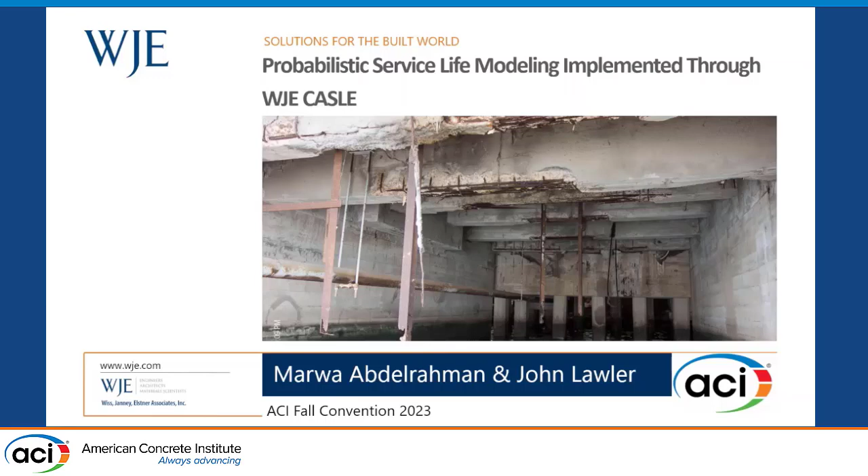Today I'm presenting on probabilistic service life modeling implemented through WJE CASLE. WJE CASLE is our in-house modeling software. CASLE stands for Corrosion Assessment and Service Life Evaluation. The model was built in-house by a materials engineer. I was involved in the development of this model, as well as some of the people in our audience here.

Being developed in-house gives us full control over the process, so we can customize how the model handles some of the input parameters based on the specific conditions and circumstances unique to each project. This is one of the important aspects of our tool because it makes it appropriate for handling unique situations.

We also use probabilistic modeling, so we recognize the inherent variability with concrete construction and concrete material, and for that we use a probabilistic modeling approach. We used our model for modeling both existing and new structures, different types of structures, and we validated our approach using data collected from actual field investigations.

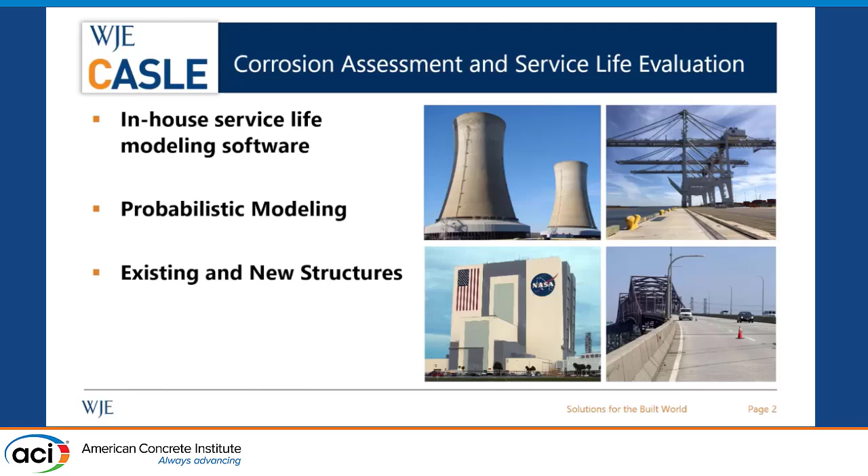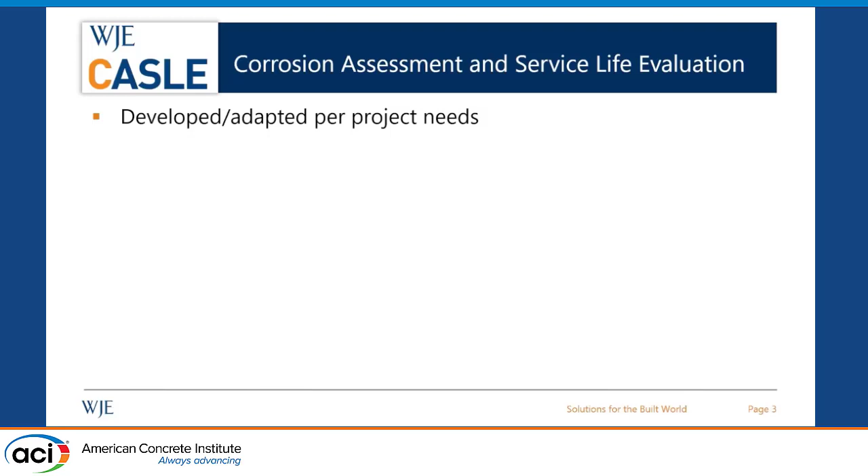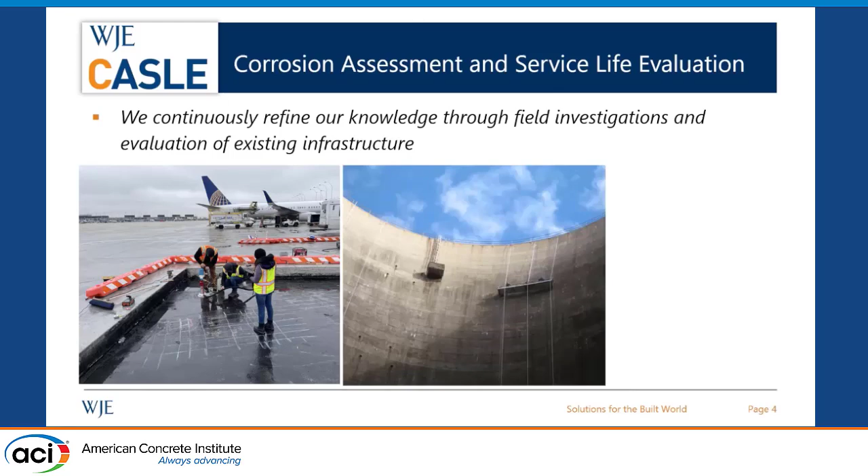Our model started with investigations of existing structures, so we developed and adapted it per project needs. We kept adding to the capabilities of our model as we came across new challenges on our projects. We looked at different types of structures, and most importantly, we continue to refine our knowledge based on what we learn every day from hands-on field investigation of existing structures to inform the durability design of new construction. This included work on bridge decks, airports, power plants, and industrial ports.

We use a customizable approach. Our model can consider cracking of concrete, for example. We can consider protective measures like sealers and coatings. We can also consider changing exposure with time, and we can model multi-layer systems, so we can model concrete overlays. We also have experience based on lab testing and field investigation on polymer overlays, so we can consider that in our model - thin polymer overlays or pre-mixed polymer concrete overlays.

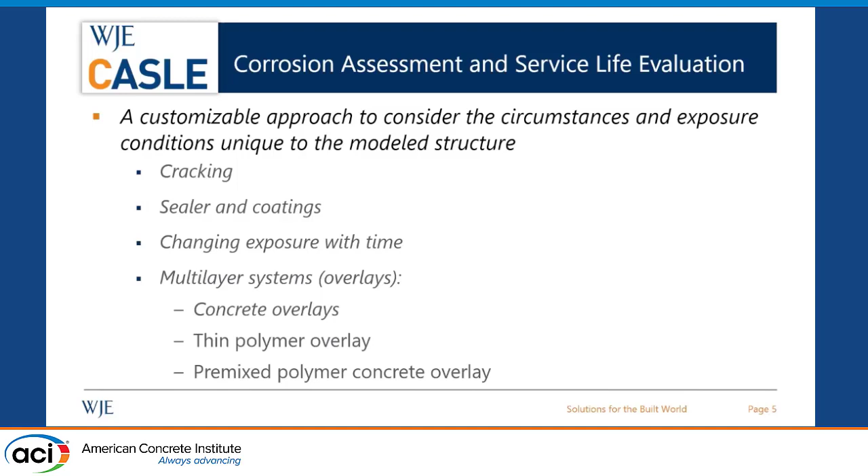In addition to all the information we learned from numerous field investigations, our model is also founded on approaches and methodology available in the literature - mainly Fib Bulletin 34. For some input parameters, we handle it similar to what is described in Concrete Society Technical Report number 61. We also refer to documents developed by the 365 committee here in ACI, and the Life 365 technical manual that Mark described earlier. This is, of course, in addition to other sources in the literature and research papers.

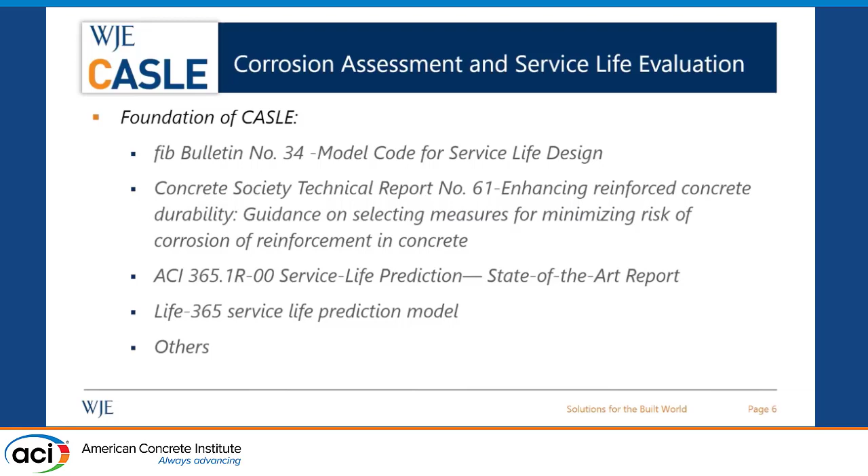Working with new structures involves making some assumptions. For example, for concrete cover we assume distributions based on construction tolerances because we don't know yet the as-built conditions. Sometimes we also assume different types of rebars, and based on the results we can decide which type of rebar would be appropriate to achieve the service life requirement. We make assumptions about exposure as well, and we test concrete performance to inform our model.

For existing structures, on the other hand, we model what is the percentage of corrosion-related damage and how that increases with time, relying on input parameters from the field investigation. Typically we collect core samples, look at chloride profiles, and based on that we can define our concrete properties and exposure conditions.

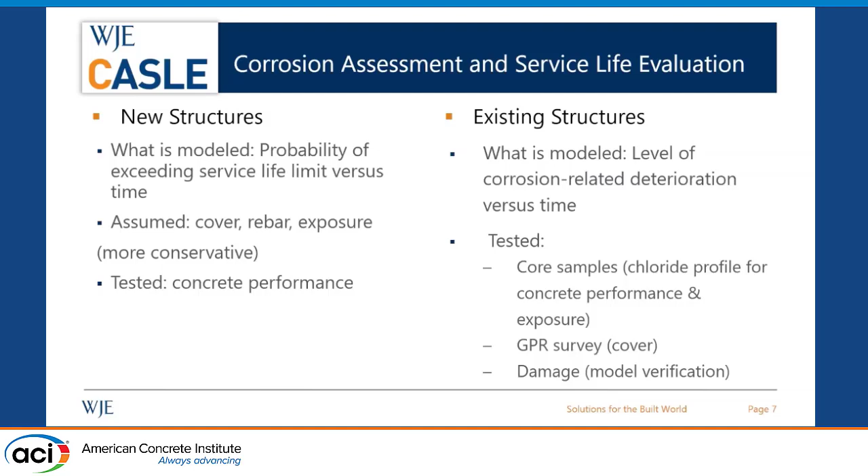We do GPR survey, and based on that we define our cover distribution. We verify our model based on the current damage levels versus what was predicted, and we can calibrate our assumptions based on that. We have validated our approach through lots of projects.

Going into the methodology of our model, and based on the cases we are given, here we're focusing on chloride-induced corrosion. I'm not going to present on our capabilities for carbonation-induced corrosion, rather focus on chloride-induced corrosion.

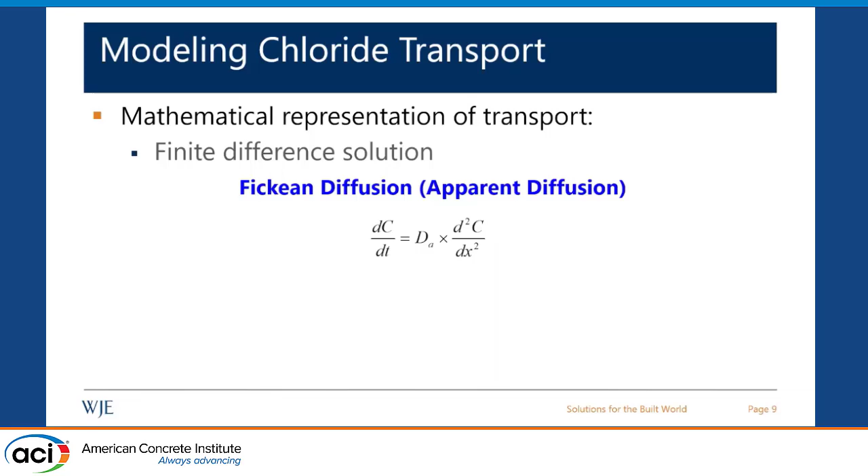We use a finite difference solution to Fick's second law of diffusion, similar to what Mark presented earlier on Life 365. But here we have full control over the process - we do the discretization with depth of the concrete and also with time, but we have full control to decide what delta X and delta T to use. That gives us the capability to model even shallow cover, which was the most discussion we had earlier here.

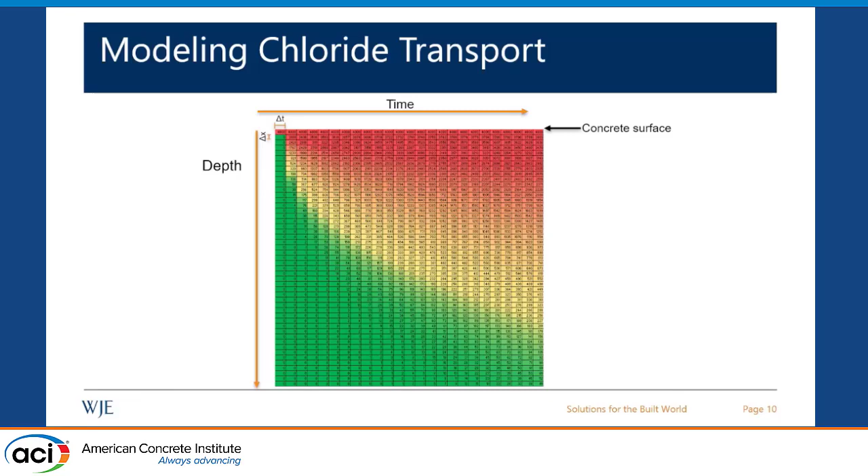At each time step, we look at the chloride profile and how that changes with time, and we define the initiation time as the time where the chloride concentration at the depth of the bar exceeds the critical concentration, which we call the chloride threshold.

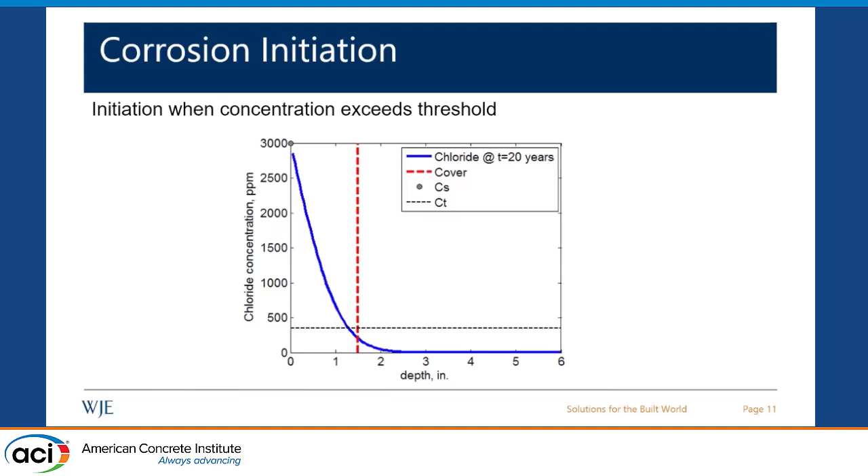Since we are performing probabilistic modeling, we describe the key input parameters with probability distributions. Our model is flexible in that we can use any probability distribution. We're not limited to normal distribution.

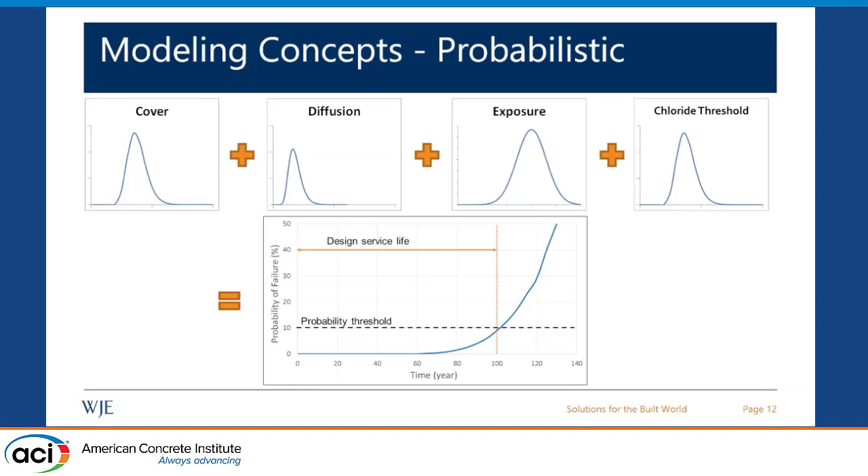So we often use, for example, log normal for cover distribution. We use beta distribution to define the chloride threshold for black bars, for example. And again, we rely on the specific conditions of the project to define the distribution for this input parameter. The result would be the probability of failure, or in the case we are discussing today, the probability of corrosion initiation with time.

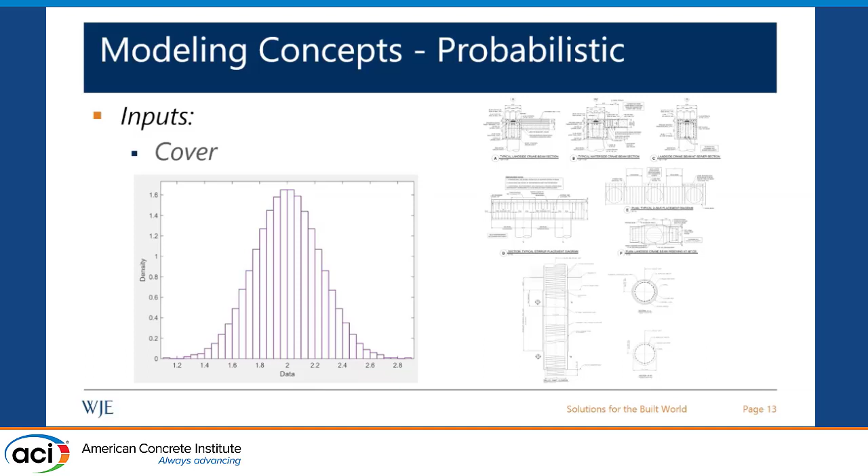So typically I'm going to go briefly on how we define the input parameters. For example, for the cover, we rely on the design drawings to decide on the average value, and then we decide the distribution based on typical construction tolerances. Sometimes this is not defined early in the project, and we use the service life modeling to inform the appropriate cover thickness to use for the element we are analyzing.

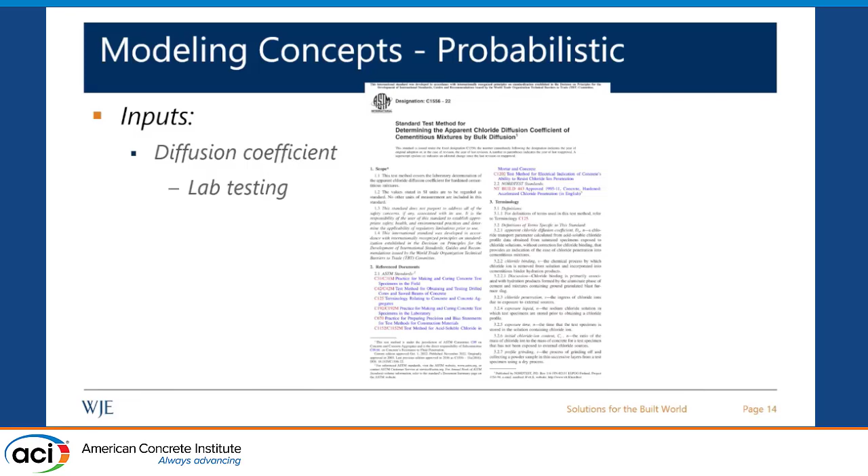For the diffusion coefficient, we like to rely on lab testing. This can be C1556, which is where you test saturated samples, expose them to sodium chloride solution for a specific exposure period - in the standard, it's defined at least 35 days. And then you look at the chloride profile, and based on that, you estimate your diffusion coefficient.

You can also use the NT-build test, which defines the chloride migration coefficient. It's a little bit different from the diffusion coefficient, because in this test you drive voltage through your sample, and you measure how far the chloride penetration got in your sample, and based on that you can define the chloride migration.

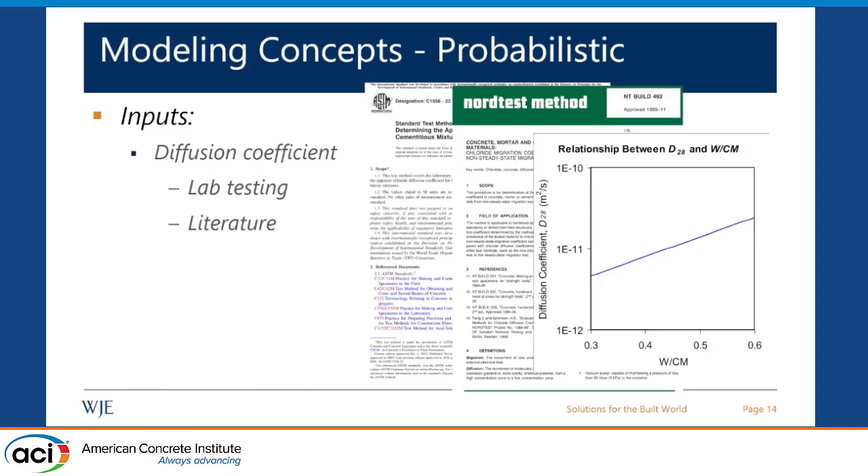And then for exposure condition, you can rely on historical data, or even better, if there is an opportunity to test samples from adjacent structures, that could give you a more accurate representation of the exposure condition on the site.

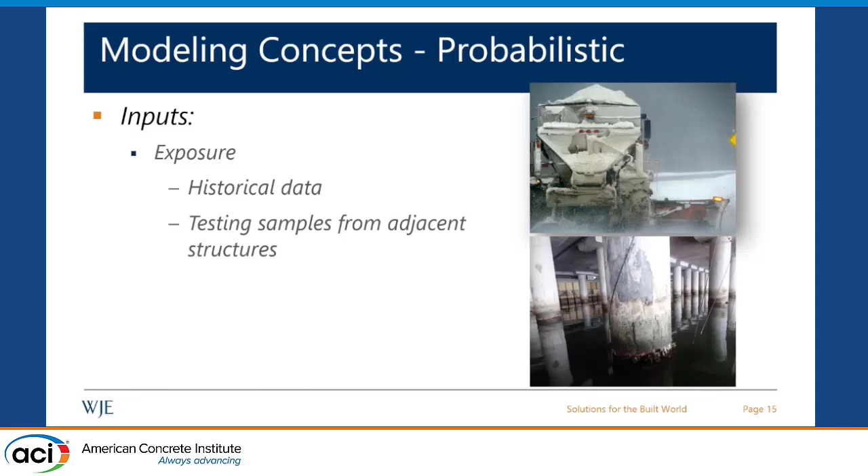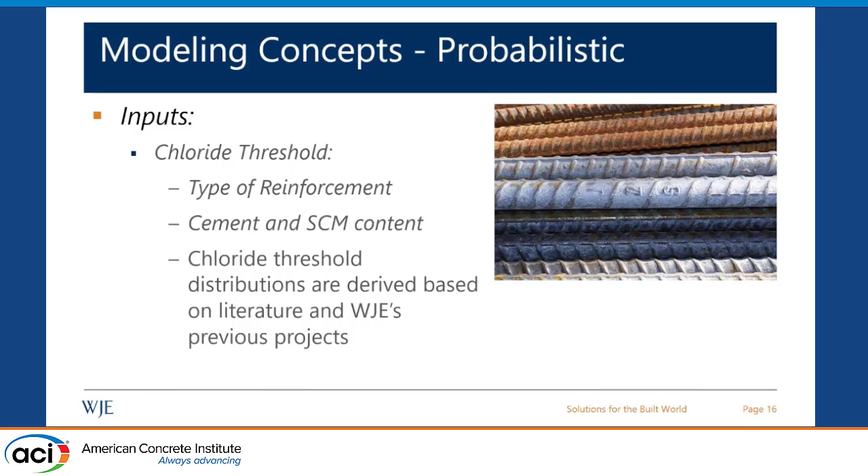So here going into the modeling cases - we have 3 cases, 3 mix designs, and 2 types of reinforcement that we are considering. The target initiation time is 100 years, with 90% confidence. We discussed that a little earlier, and we are interpreting that we need a maximum of 10% probability of corrosion initiation at 100 years.

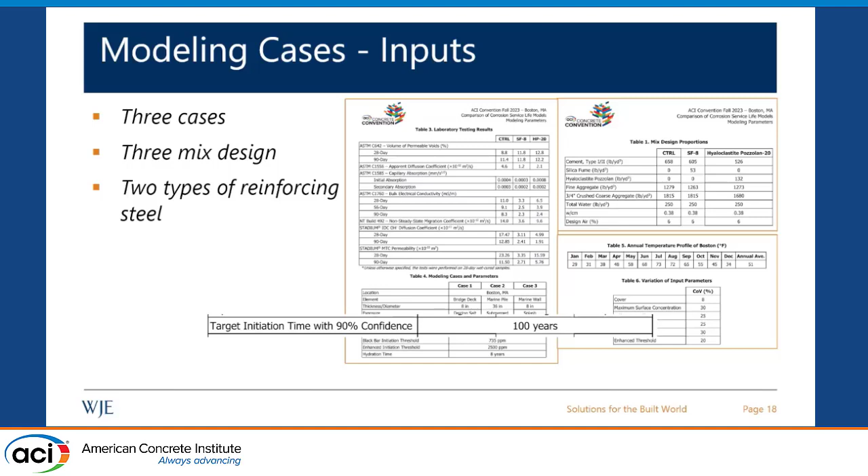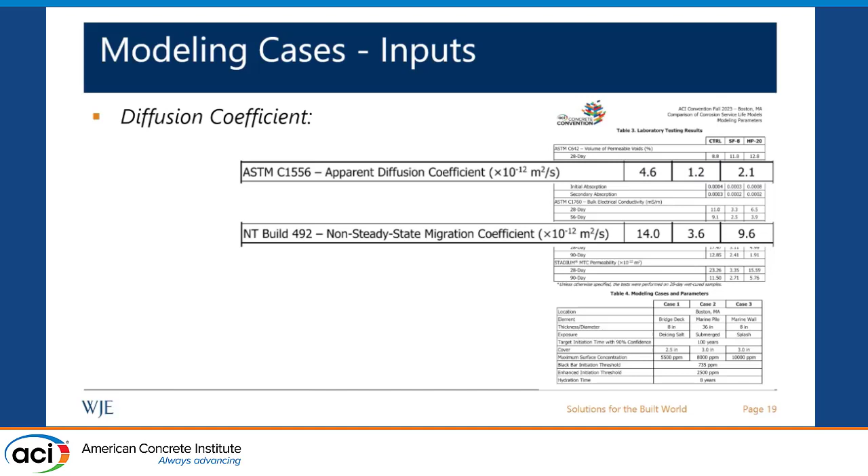For the diffusion coefficient, we were given results using NT build 492, and also bulk diffusion test results C1556. Based on our extensive experience with project work, we found that NT build 492 tends to give us conservative results relative to the diffusion coefficient, and the apparent diffusion coefficient provided us with more representative values. So here, in all the results I'm going to show, we are relying on the results from ASTM C1556.

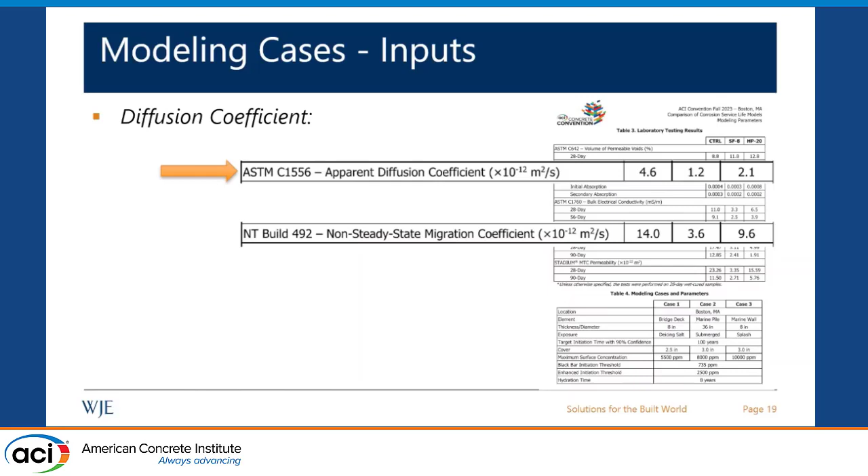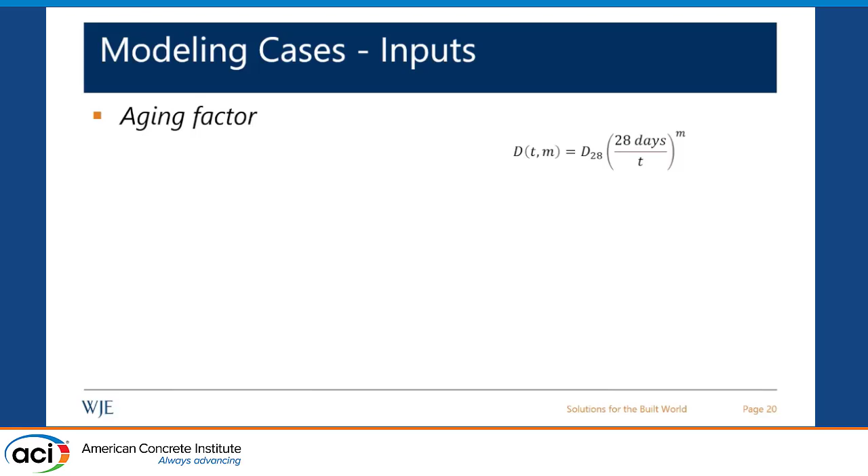Then talking about aging factor - the diffusion coefficient decreases with time as concrete matures, and we describe that in our model based on the aging factor. The provided information given as part of the inputs were mainly bulk electrical conductivity testing, and I'm showing here the results we have from that test. It was also given to consider 8 years of hydration time.

However, any electrical testing is actually affected highly by the chemistry of the pore solution as well, which could potentially give you misleading results, especially with some supplementary cementitious materials. So you have to be careful considering the lab test results when performing your service life analysis.

Based on the bulk electrical conductivity, this was the calculated aging factor, similar to the numbers Brad mentioned earlier. To give you an indication of how aging factor can affect the results, here are 2 curves with the same D28 but different aging factors. The blue line uses an aging factor of 0.24, assuming a hydration time of 8 years, and you can see you're getting to a value of about 0.04.

With a higher aging factor of 0.84, similar to what we are getting for the pozzolan mix here, you're getting a very, very low value at 8 years - down to 0.002. So aging factor affects the results significantly, and it's very important to take a step back and evaluate the lab test results before using them in your model.

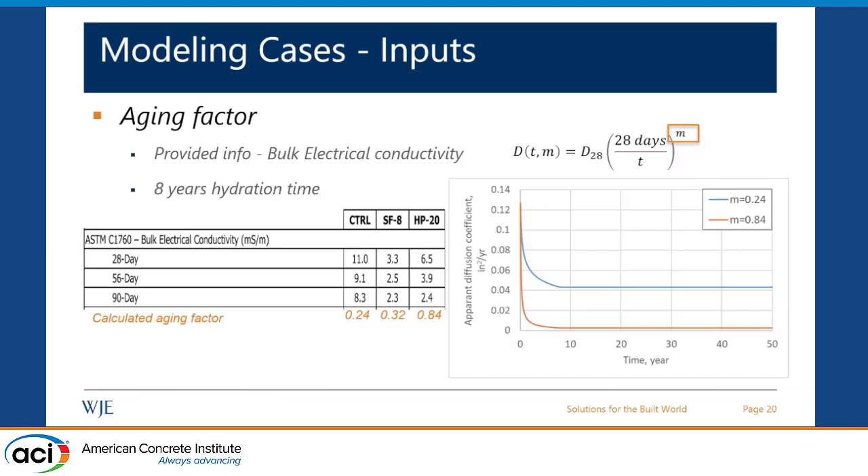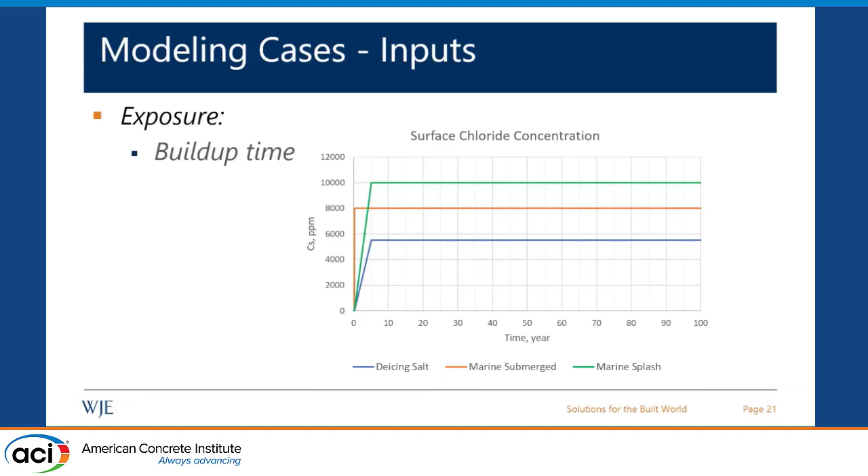For exposure condition, we interpret the maximum chloride concentration as the ultimate value you would get at the surface, and we used a buildup time of 5 years for the cases of bridge deck with deicing salt, and also for the marine splash case. So it takes 5 years until you get to those ultimate concentrations. For the submerged zone, we didn't assume any buildup time—we assumed that value is going to be there from the beginning of exposure. For splash condition, for the case given here with marine wall splash exposure, we

recognize that wetting and drying in the splash zone will result in what we're calling a convection zone. This would result in a deeper chloride peak, because in the non-saturated region near the surface, diffusion is not the main transport mechanism of chloride anymore—you have some capillary suction and absorption that contribute to chloride penetration.

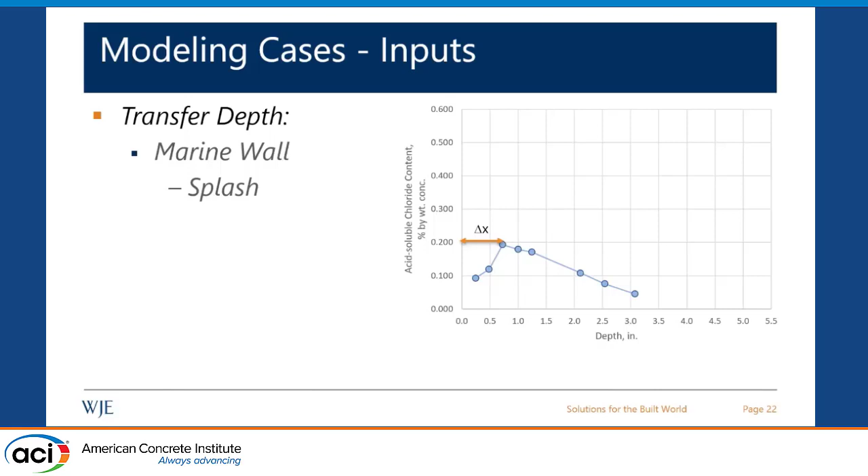To consider that in our diffusion-based model, we use a transfer depth—this is the depth until the peak of chlorides in your concrete. This is similar to what is presented in Fib 34, which gives you a distribution to use for that transfer depth function: a beta distribution with an average value of 0.35 inches. We validated that through lots of investigation on actual marine structures.

We looked at, for example, a few profiles here, but while doing this work I looked through 3 different projects we did before—more than 30 chloride profiles—and based on that, the Fib 34 distribution is actually a good representation of that transfer depth. However, when I looked at those profiles, many of them still show a diffusion-based chloride profile, so it's on the conservative side to use Fib 34.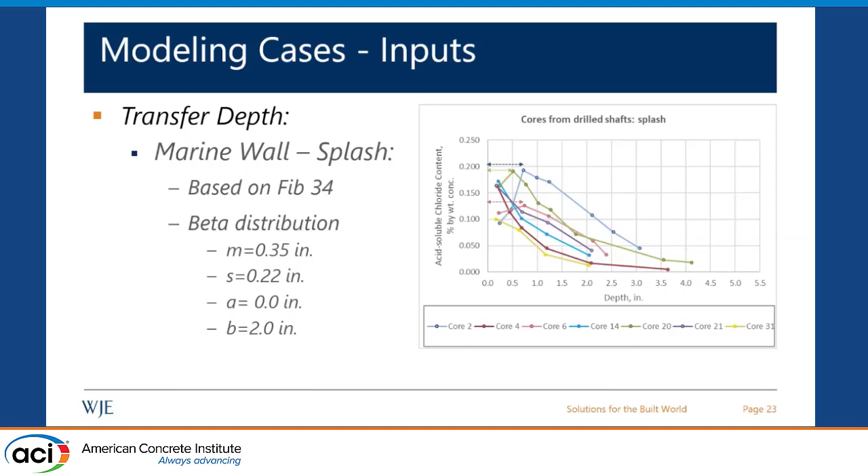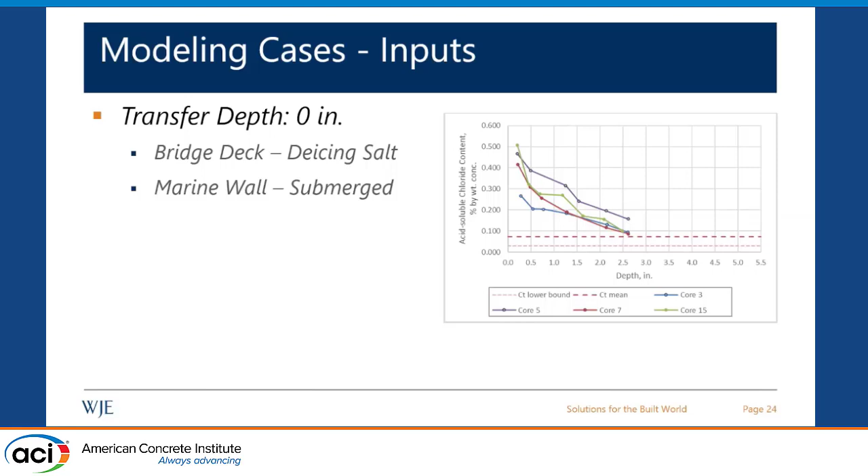For the bridge deck with deicing salt and the marine wall submerged case, we don't expect transfer depth, so we assume a transfer depth of 0 for those cases. Here are some chloride profiles from the tidal zone, and the same for chloride profiles from bridge decks—we've seen many of those, and they're typically dominated by diffusion chloride transport.

These results are based on the inputs we were given. We considered the aging factor based on the electrical conductivity testing, and we considered the chloride thresholds that are given. Based on that, similar to what others have presented earlier, the black bar didn't give us 100 years of target service life. For the cases with the control mix or the silica fume mix, and for the enhanced bar, the control mix also didn't give us 100 years, but silica fume mixes and natural pozzolan got us to 100 years.

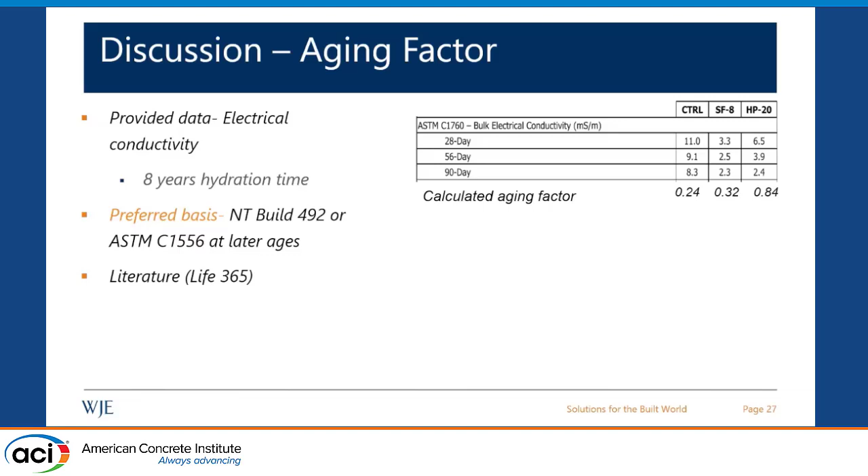However, if we were modeling this for a project, we might have approached some of these input parameters differently. For example, looking at the bridge deck deicer case, let's look closer at the aging factor. The results I presented earlier are based on the calculated aging factor from the bulk electrical conductivity testing. However, because this is affected greatly by the chemistry of the pore solution, which has little to do with chloride transport in concrete, we would prefer to rely on NT Build results or ASTM C1556 at later ages. Recognizing that that takes a long time and sometimes isn't feasible with new construction, we turn to the literature.

Here, for example, I'm showing the value if we use the data presented in the literature and in Life 365 for aging factor. Life 365, or the data presented in the literature, summarizes that it assumes 25 years of hydration time—the testing done to produce this data looked at chloride profiles at different ages up to 25 years, and conservatively they capped the hydration time at that value. They came up with a correlation based on the data they've seen for what the aging factor would be as a function of the percentage of fly ash and slag in your mix, and conservatively they capped that value at 0.6.

So here, if we look at the mixed designs we were given and use the correlation in Life 365 to estimate the aging factor, we get a lower value. For the natural pozzolan case, it's much lower. If we consider that this natural pozzolan performed like a fly ash and use that to get an aging factor based on the Life 365 correlation, we get 0.36, which is much lower than the 0.84 suggested by the bulk electrical conductivity testing.

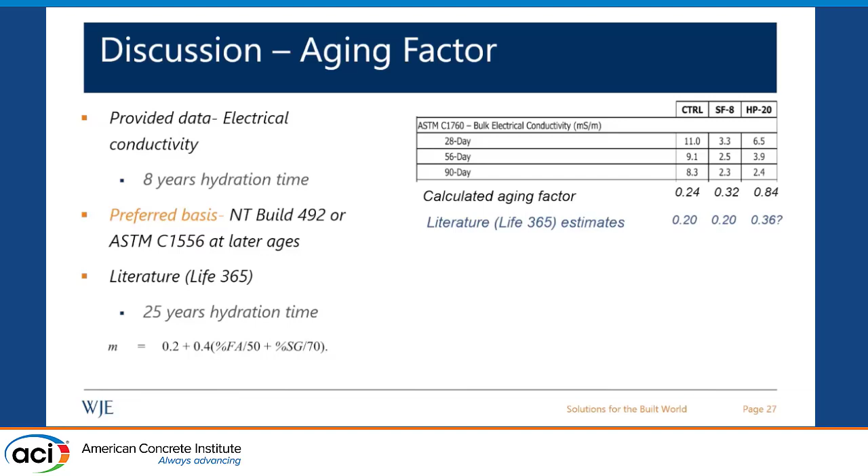However, keep in mind that when we use the bulk conductivity testing, we were assuming 8 years of hydration time, but with the Life 365 values, we are assuming 25 years of hydration time.

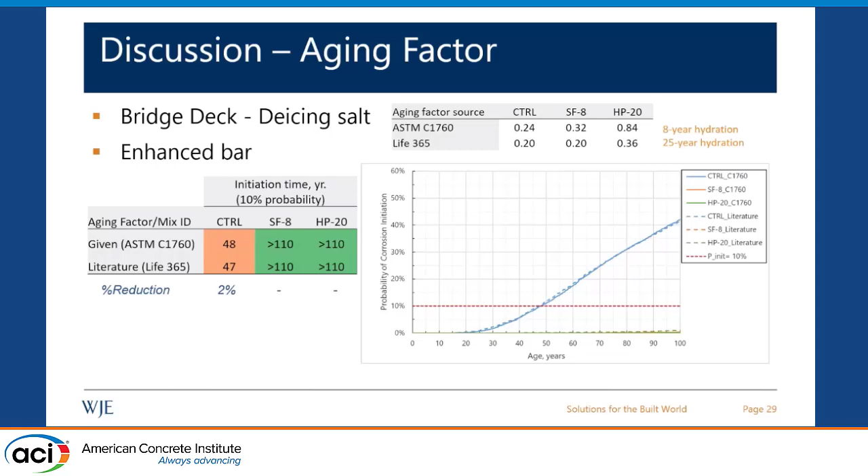Looking at the enhanced bar cases, the aging factor was not as significant to predicted service life as in the cases of black bars, especially for the mixes with silica fume and natural pozzolan. I ran the analysis up to 110 years, so I didn't extend it further. It could have resulted in bigger differences if we extended the analysis period.

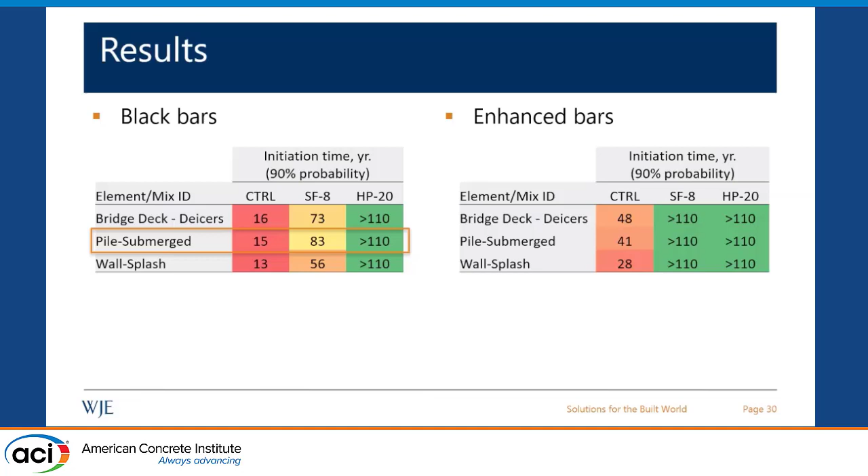Again, looking in more depth at another input parameter, let's look at the pile submerged case, specifically the assumed chloride threshold in the analysis. The provided values given for the session had an average of 735 ppm with a coefficient of variance of 30%, assuming a normal distribution.

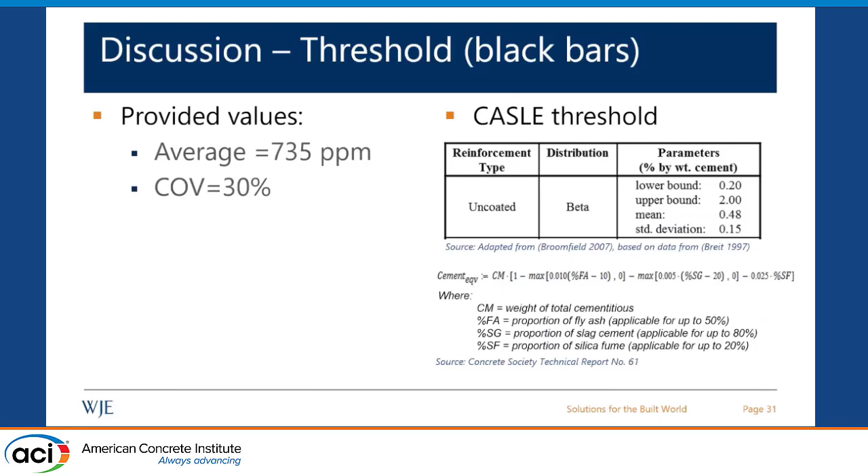Typically what we use with CASLE is a beta distribution. This beta distribution was developed based on data presented in Breit's thesis in 1997, and we adopted risk categories defined in Broomfield to develop this distribution. We recognize that the chloride threshold is affected by your mix design, including cement content and whether you have supplementary cementitious material. The approach we've taken to consider that is similar to what's presented in Concrete Society TR 61, which takes into consideration how fly ash and slag can reduce the hydroxyl ions in your concrete as they react with the hydration products, affecting what we call effective cement content. This is what we use to come up with the chloride threshold.

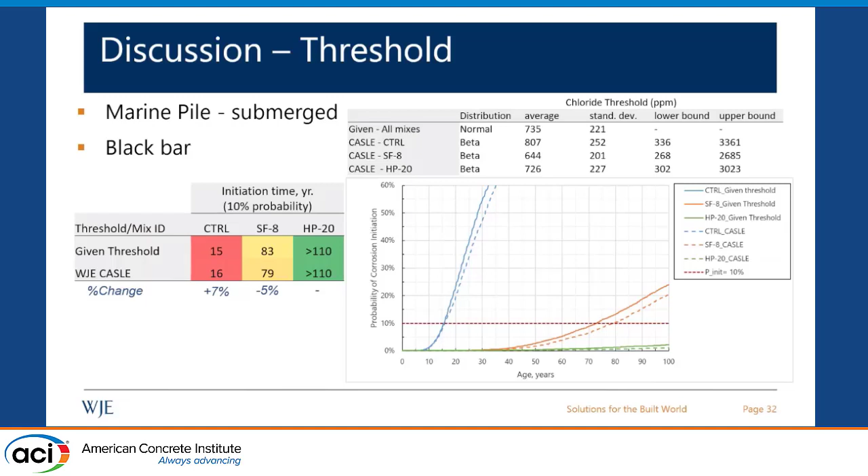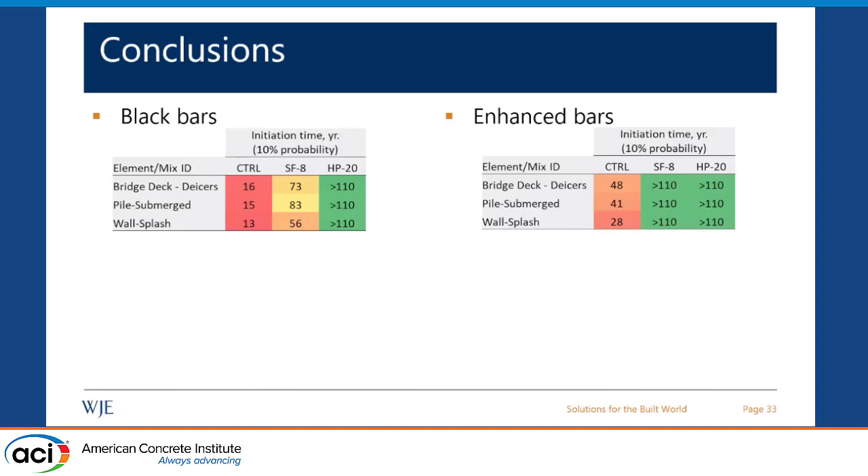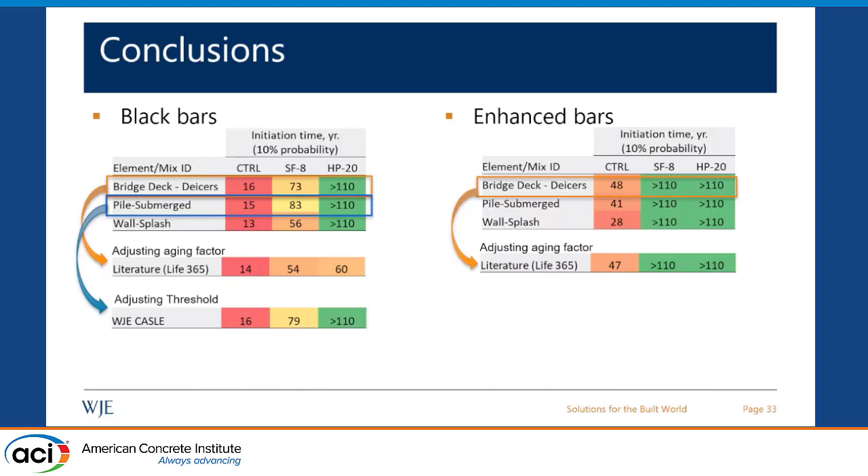In conclusion, we would like to highlight that the accuracy of your model depends on how accurately you're representing the mechanism. For example, if you have a splash zone, you have to consider convection depth, and also how accurately you are representing your input data, so how representative and accurate is your characterization of your input distribution.

So here I'm summarizing the cases that we ran. When we looked at the aging factor, you see a big difference between the assumptions in the data given as input parameters for this session and the aging factor presented in the literature. The same with the threshold—that also produced some changes in the predicted service life. It's very important to take a step back and look at how you're getting your input parameters and how representative they are of actual conditions, and how much change you need to consider in your modeling approach to capture all of those changes. Thank you.